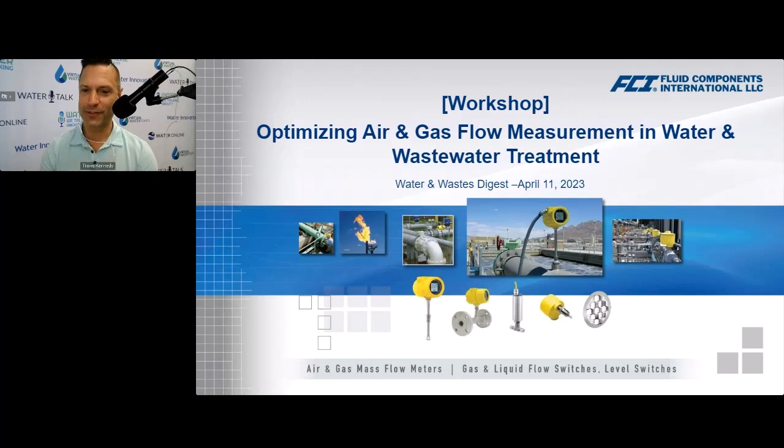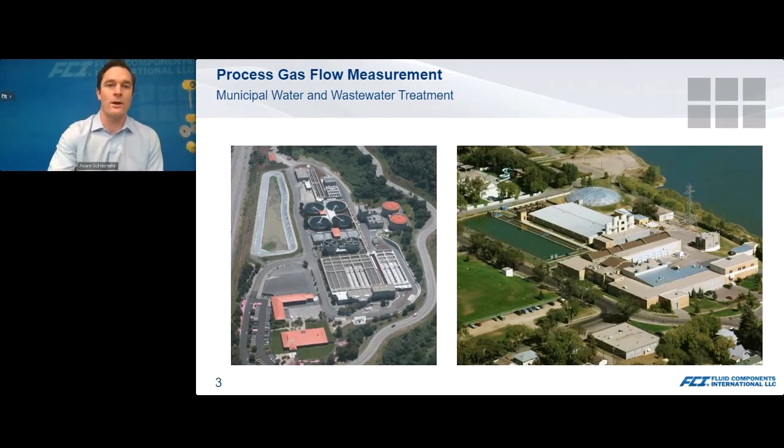One issue that we see quite a bit when we work with our customers is what happens to a measurement as a result of inadequate straight run. There's a certain amount of real estate that's needed to get a good, accurate measurement. When obstructions are introduced either upstream or downstream of the measurement point, or you simply don't have enough straight run, that will have an impact on the level of accuracy of your measurement.

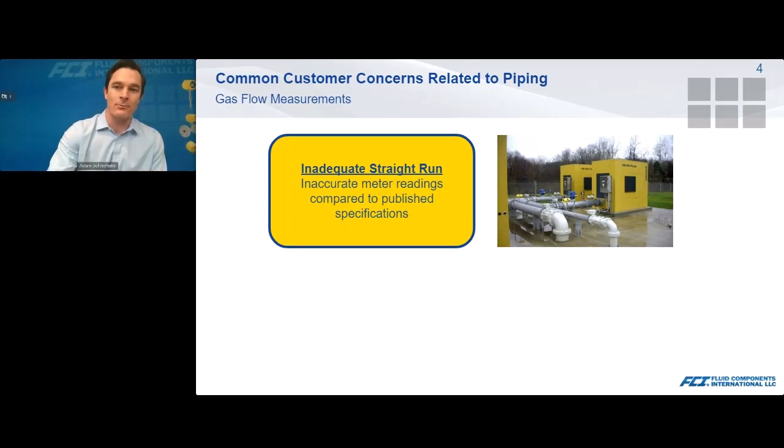So we have some CFD models that we've run in our application evaluation software to educate on how different obstructions and different amounts of straight run will affect your measurement. We're also going to talk a little bit about flow conditioning, which is a solution, and the effect of flow conditioning on permanent pressure loss in your system.

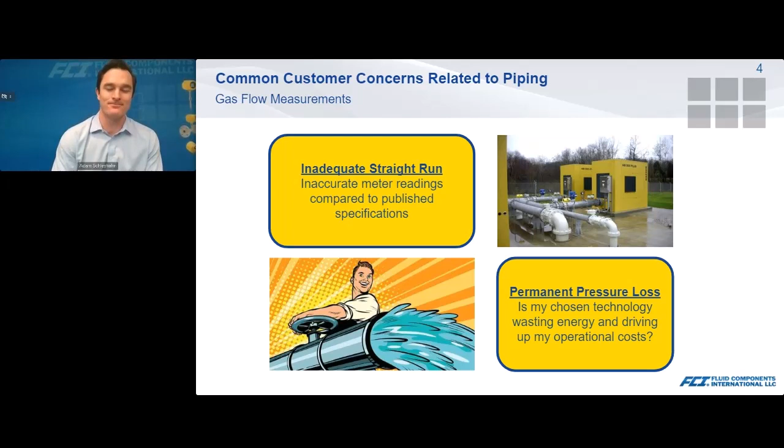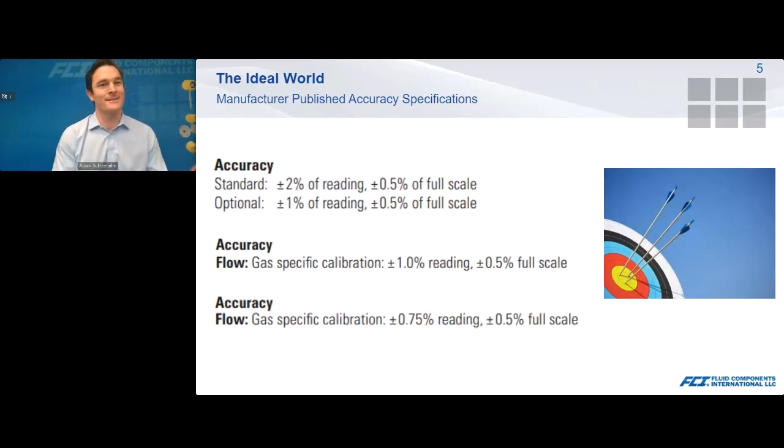Moving forward here, anything that you read about in a vendor's data sheets, in their marketing materials, any of the accuracy, the repeatability, anything published there assumes that you're operating under perfect lab conditions. Not necessarily what's in the real world, but perfect lab conditions. And what does that mean? Well, there's a few things that you see in a perfect lab that you won't see in the real world.

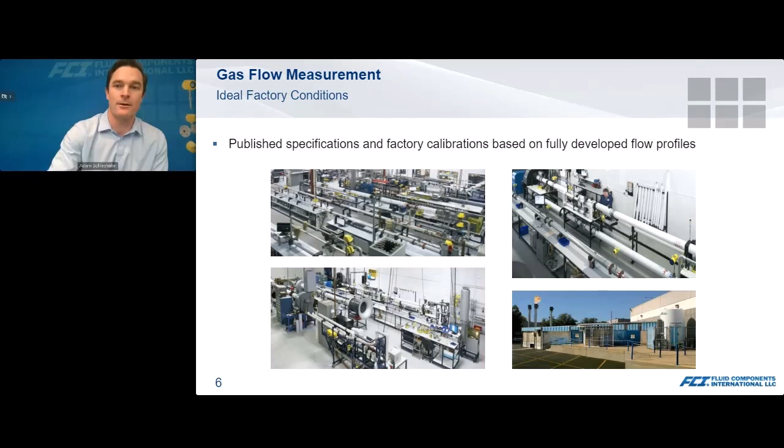Number one, calibration happens with clean, dry gas. You have reference meters that are more accurate than the instrument being calibrated. And the important thing for this conversation is that there is plenty of straight run. Here we see our calibration lab in San Marcos, California, and you see plenty of straight run in our cal lab. Now, why is the straight run important?

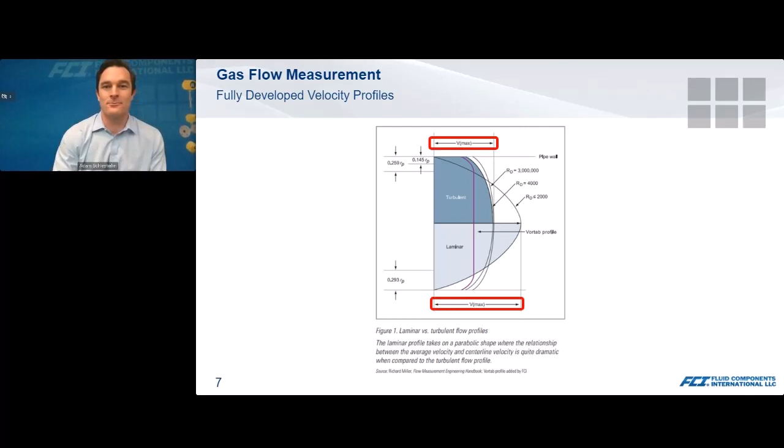Now, we talked about ideal conditions and perfect lab conditions. In the real world, in the actual application, quite often the focus is on those higher value, big ticket items, and selecting a point to make a measurement and install an instrument can quite often be an afterthought. So quite often what we hear is, we know that 20 diameters upstream and 10 downstream is needed, but we've got this elbow, we've got this valve, we have some obstruction, and that's not possible. So I'll talk a little bit about how that will impact the accuracy of your measurement, as well as a solution that we see work quite a bit.

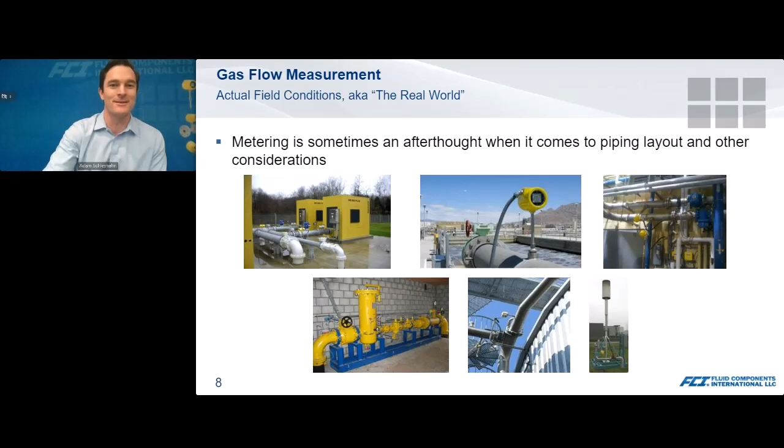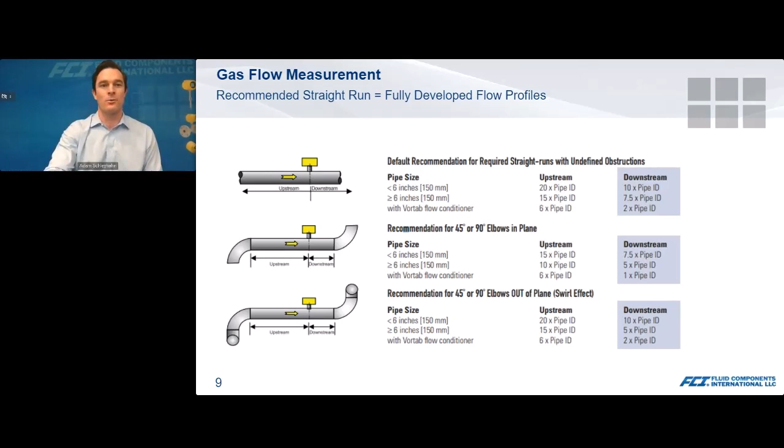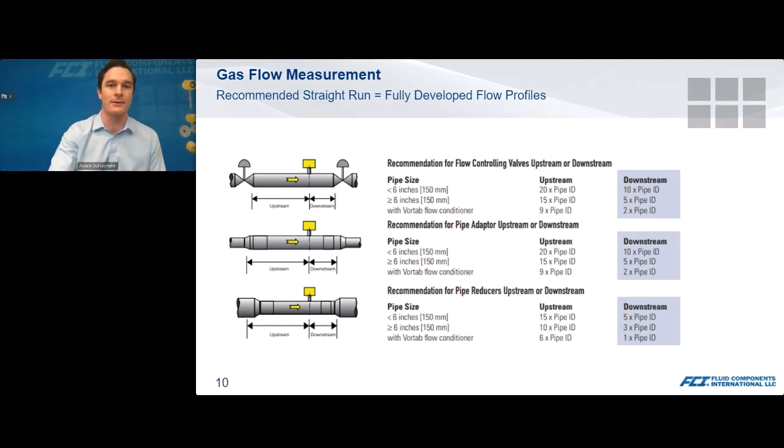Now, our guide is 20 diameters of straight run upstream and 10 downstream, whether you have elbows in plane, elbows out of plane, reducers, adapters, or valves. Our guidance pretty much runs 20 upstream, 10 downstream to give you the fully developed profile that you need to make an accurate measurement. Now we're running CFD here, computational fluid dynamics.

What you see here is that red in the pipe on both axes represents the higher flow velocity, and the green and the blue represents the lower flow. Now, this is your perfect 20 diameter straight run. What you see is a very nice, fully developed flow profile. This will give you the ideal lab condition, excellent measurement that you're looking for.

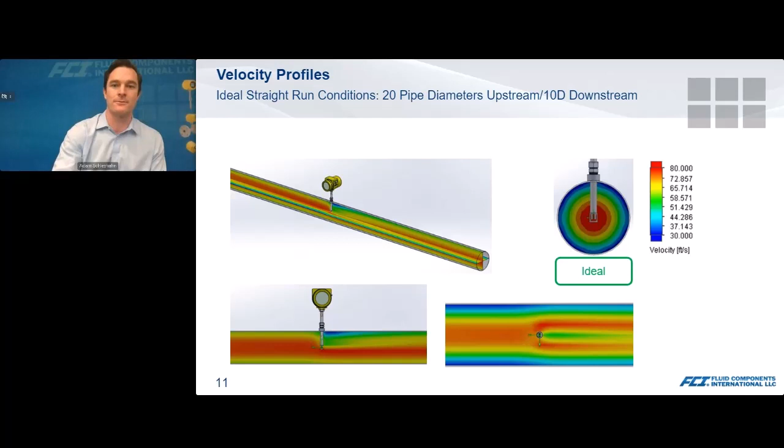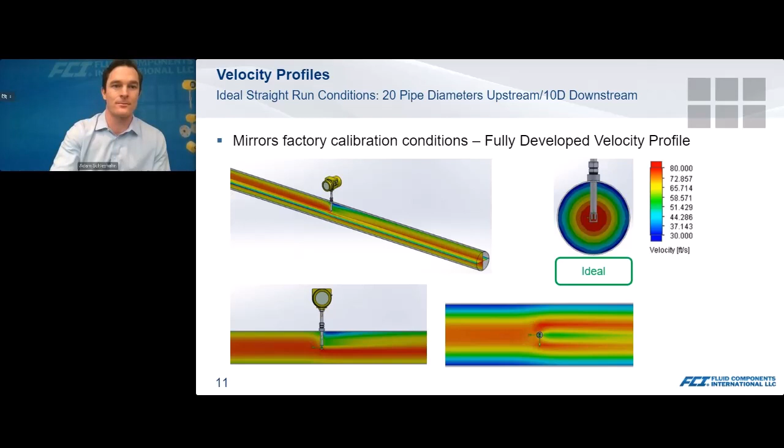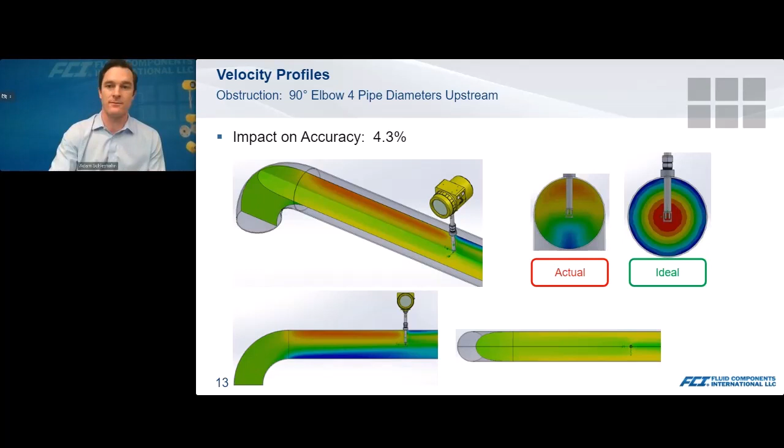Now, we've said we would run a few of these. One thing that we see everywhere is elbows. Here's a situation where an in-plane elbow is installed 4 diameters upstream, and you see that it throws off the flow profile. We're much closer to the top of the pipe with that point of maximum velocity. And even a very common obstruction such as an elbow will cause 4.3% measurement uncertainty.

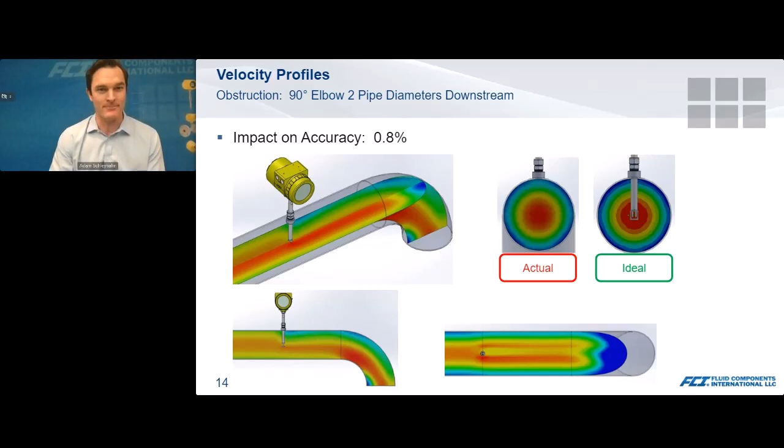Now, a little bit more benign, but still worth mentioning, is that it's not just elbows and obstructions upstream. The same will apply downstream. Introducing an elbow 2 diameters downstream will cause a more benign and perhaps more acceptable measurement uncertainty, but still introduces almost a 1% additional impact on your accuracy.

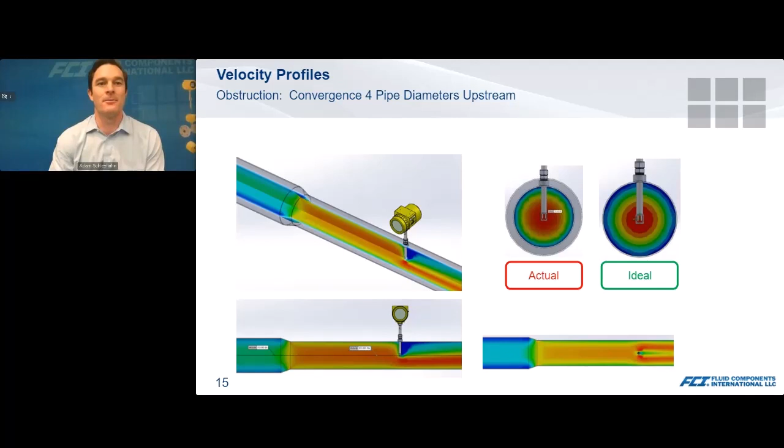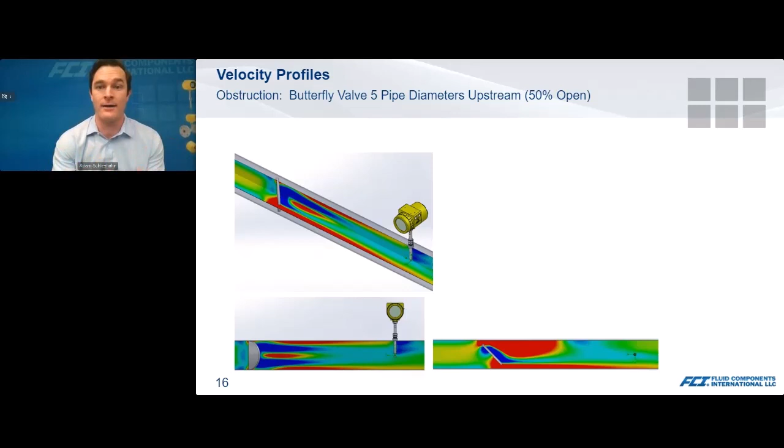Now, getting into some more of the things that we see that continue to cause issues, a convergence 4 pipe diameters upstream causes a 1.3, maybe perhaps not the worst. But when you see items such as the butterfly valves, now that really does create a significant impact on the flow profile that will have a much more significant impact on the accuracy of your measurement.

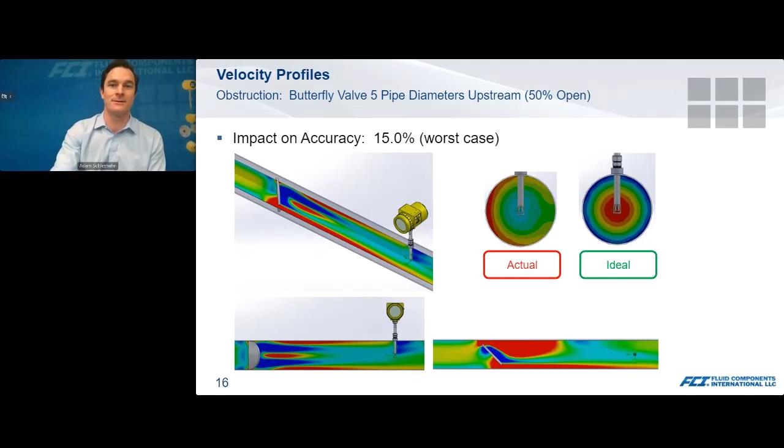In this case, 5 diameters upstream with a half open butterfly valve will introduce 15% additional uncertainty into your measurement. The same butterfly valve downstream, 1.7. So again, more benign, but still worth mentioning.

Now we've introduced both. So what happens if you have a convergence 7 diameters upstream, a butterfly valve 4 diameters upstream, and an elbow 2 diameters down? You'll see that it really throws off the flow profile. It creates a situation where you're simply not able to make a good, representative, accurate measurement of what's going on. And that has an 18% impact on your measurement.

So one thing that we have in addition to the CFD models that we've been going through is our application evaluation software. Based on all of the data that we've accumulated over the 50 years that we've been working with our customers, we have a pretty good understanding of how different obstructions and different levels of clearance upstream and downstream will impact accuracy.

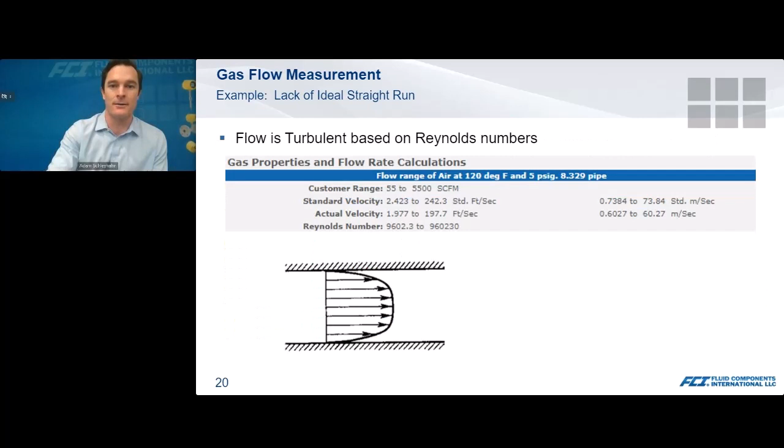So a butterfly valve upstream will introduce a 9% inaccuracy in certain situations. And we could go through these, but the point here is that if you use a flow conditioner, typically something that is installed upstream of where the measurement is made, that will help to create a more uniform and repeatable and consistent flow profile that can help to alleviate and eliminate some of the uncertainty that is introduced by the obstruction.

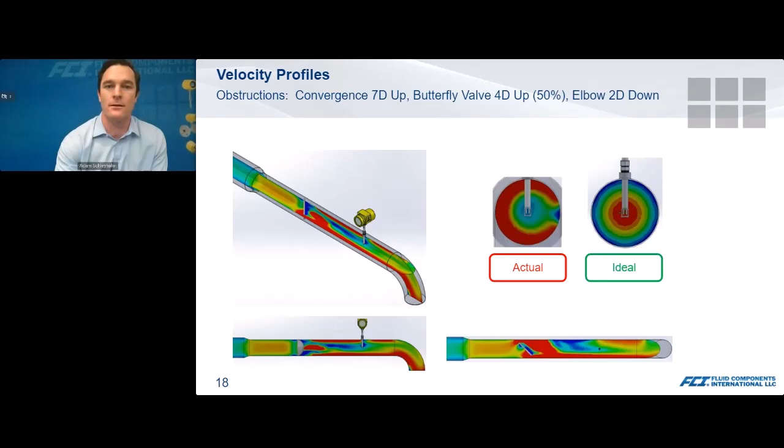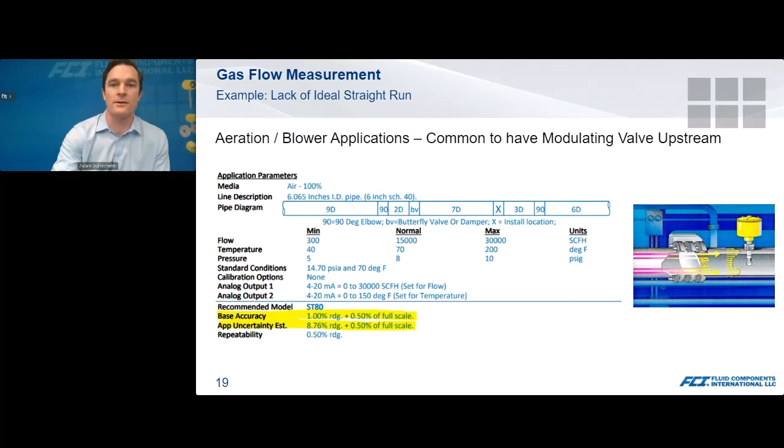So going back to the initial model that we had of the butterfly valve, where we had the 8.76% uncertainty without flow conditioning, installing a flow conditioner 3 diameters upstream will bring that from 8.76% uncertainty down to a much more acceptable 1.04%.

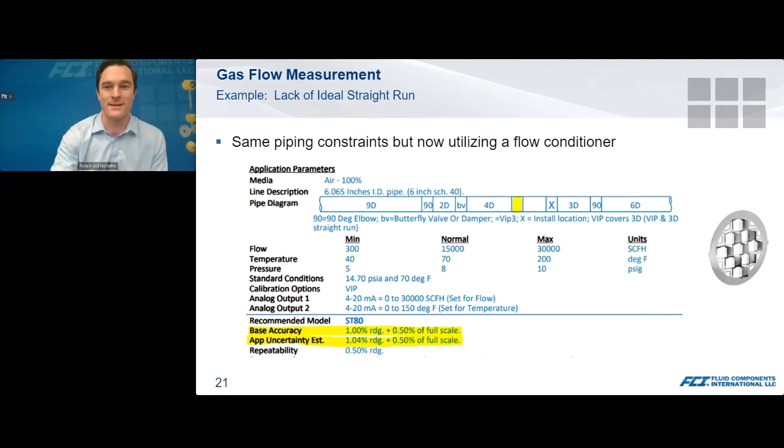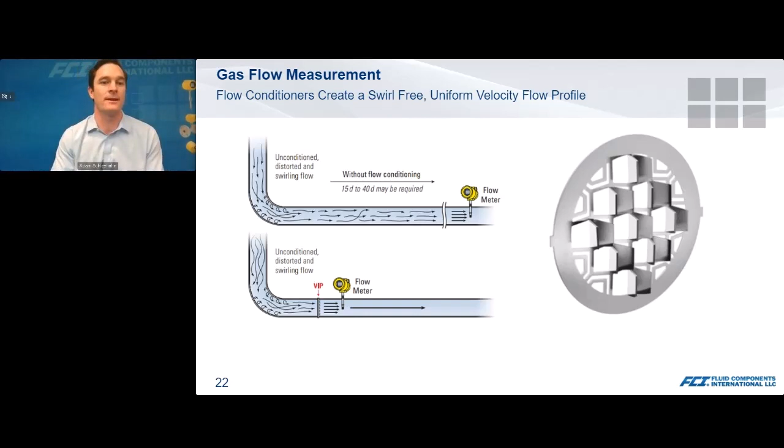So the idea of a flow conditioner that you see here, in our case, it's the FCI VIP plate, is it gets installed 3 diameters or 4 diameters upstream. It depends on the application. And all the eddies and the swirl and all the turbulence that's introduced into the flow profile is conditioned, and the flow becomes a more consistent and more uniform and more repeatable profile to measure, which enables an accurate measurement, especially if the instrument is calibrated with the flow conditioner.

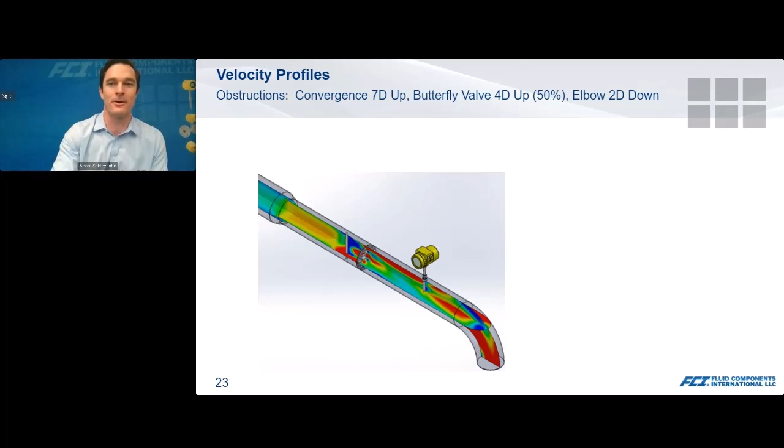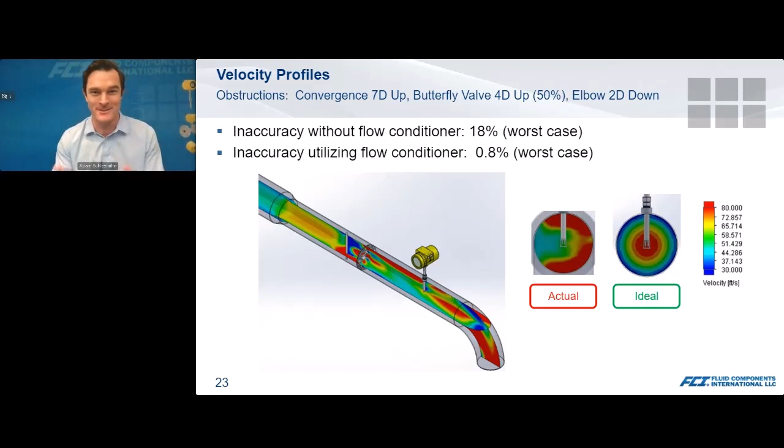So applying the flow conditioning to our nightmare example here with the butterfly valve and the convergence in your flow stream and the elbow downstream. Remember, this was 18% uncertainty introduced. This was the worst case. It essentially destroyed our flow profile for a good measurement. With a flow conditioner in this application, it brings the uncertainty from 18% down to 0.8. So you could really create a much better condition for an accurate measurement in those tight quarters with a flow conditioner.

So the installation, as I said, is important. A good manufacturer will calibrate the instrument with the flow conditioner in the cal lab to give that good representative calibration of what it will look like in the application.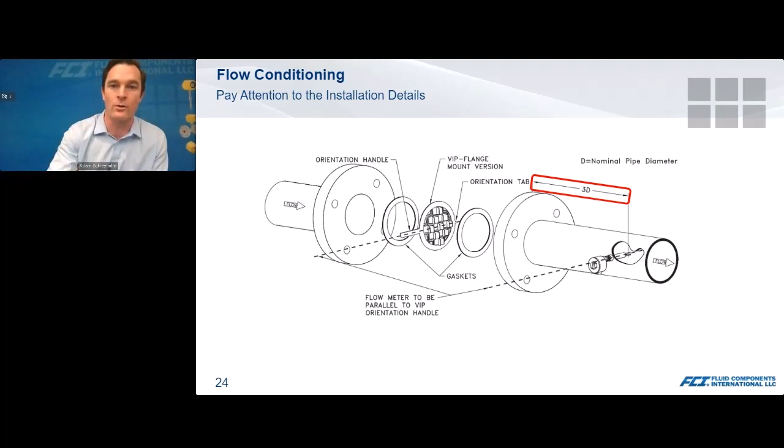But really, what I want to talk about in addition to the flow conditioning is that not all flow conditioners are created equal. A flow conditioner will introduce permanent pressure loss into your system. And just to give an example of what that will look like, our instrument without a flow conditioner at 5500 SCFM, ours is an insertion style, will introduce 0.08 PSIG of permanent pressure loss. Now that's negligible.

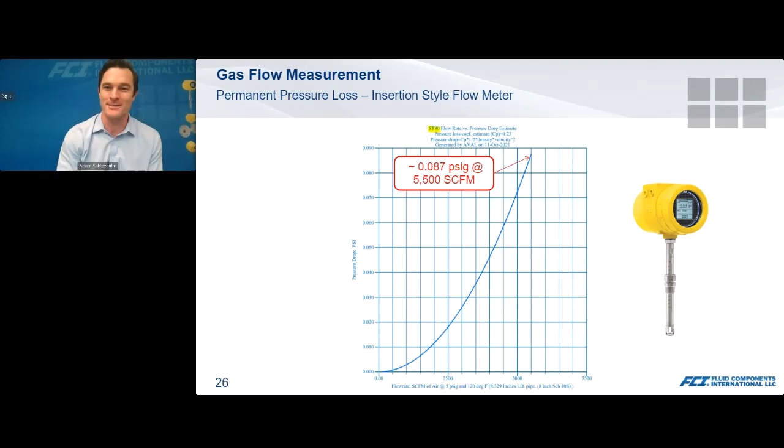Looking at what you would get with our VIP plate, in addition to that it adds about another 0.5 PSIG, for a total permanent pressure loss of 0.61 PSIG. What you'll see is that if we're 0.08 PSIG from our meter in the flow stream pressure loss, and we're overall 0.61, the bulk of that permanent pressure loss with any instrument and any flow conditioner will come from the flow conditioner.

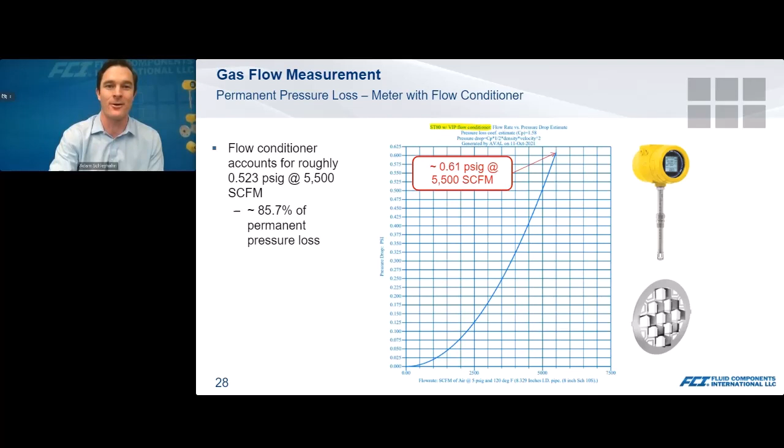As I said, not all flow conditioners are created equal. In our case, in that upper left corner, you see our Vortab VIP plate that we calibrate our instruments with, intended for use with FCI flow meters. But there is a multitude of different flow conditioning technologies out there—your screens, your tube bundles—there are certainly different options, and each does come with a different amount of permanent pressure loss.

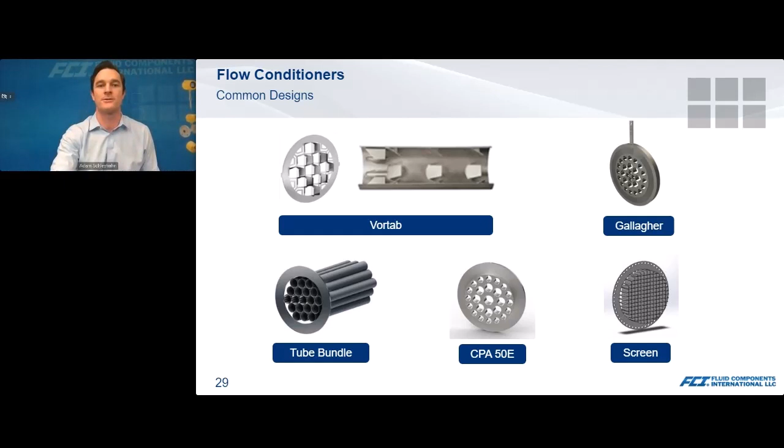So what does that look like in the application? As I mentioned, the VIP plate is about a 0.5 PSIG permanent pressure loss, and the different options available from different manufacturers will run anywhere from 0.5 all the way up to about 5.23 PSIG permanent pressure loss. So the type of technology you use matters. Being sure to calibrate the instrument with the flow conditioner matters, and there are different levels of pressure drop with the different flow conditioning options.

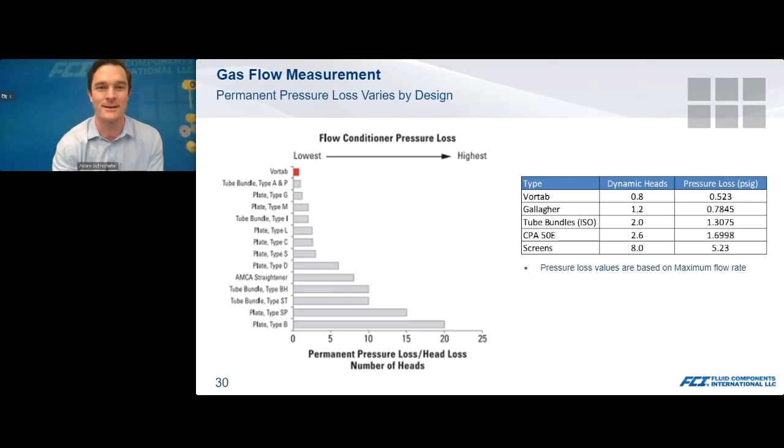So what I talked about today, wrapping it up: there's two issues here. One is inadequate straight run. 20-10 is ideal—20 diameters upstream, 10 downstream. If you don't have that, no problem, let's use a flow conditioner, and that could knock down your measurement uncertainty from as high as 18% down to 0.8% in certain applications. And the second point is not all flow conditioners are created equal.

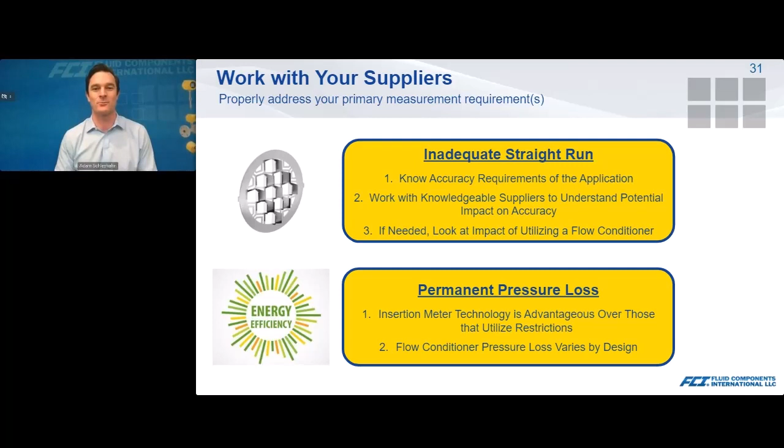Calibrating with the flow conditioner is important, but even more importantly, a consideration is that permanent pressure loss, and different flow conditioning options will have different levels of pressure loss.

So that's my presentation here. We have more options available.